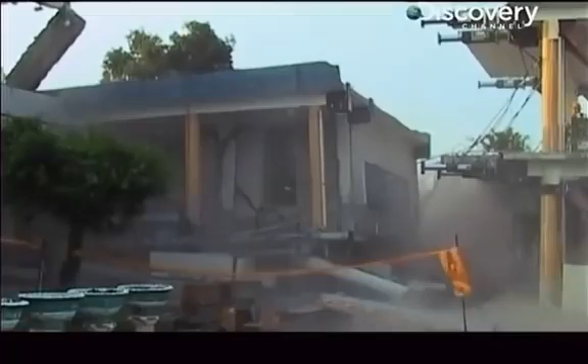Taiwan is under attack. Unpredictable forces of nature threaten the ambitions of this Asian economic giant. To fight back, the island's best minds race to deliver innovative ideas: high-tech factories that manufacture ultra-safe building blocks and assemble them ultra-fast.

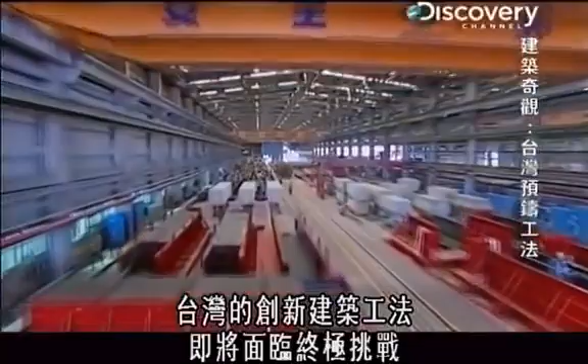Now, Taiwan's unconventional construction method faces its ultimate test: how to prefabricate buildings of all shapes and sizes. A billion-dollar high-tech factory, a 22,000-seat stadium, and a towering 38-story residential block.

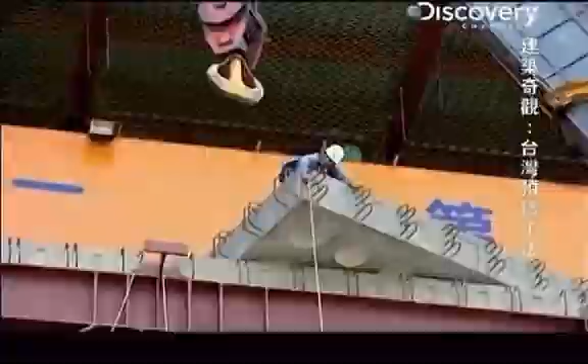Tempestuous weather, near impossible deadlines, and the constant threat of earthquakes combine to make the engineer's job even tougher. This is like Lego, but it's a million times harder and bigger. If they succeed, Taiwan's prefab magic will become a man-made marvel.

Taiwan, a mountainous island more than 30,000 square kilometers in size, is home to 23 million people. Rapid industrialization in the late 20th century transformed it into an Asian economic giant. Its foreign reserves are now among the world's largest.

But Taiwan's growing economy is vulnerable. The island is continually attacked by one of nature's most destructive forces, earthquakes. We have about 200 earthquakes of magnitude 5 every year, and then perhaps we have an earthquake of magnitude 6 about 3 or 4 times a year.

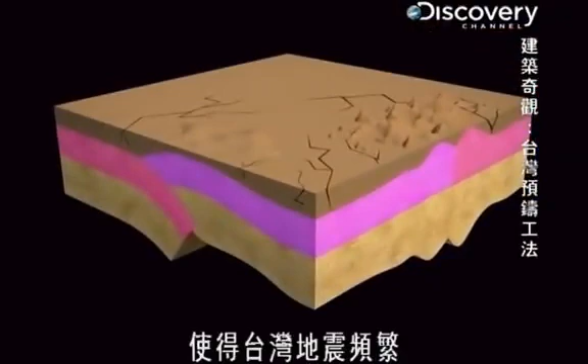Taiwan's geological instability is due to its position on the Earth's crust. It sits precariously on the fault line between the Eurasian and the Philippine Sea plates. Constant movement between these two creates powerful shock waves, producing the many earthquakes experienced by Taiwan, dangerously exposing its densely populated cities to potential devastation.

Many buildings may not be sufficiently strong enough to resist the earthquake force. Beams and columns could be cracked, and even more seriously, buildings could collapse, causing loss of lives.

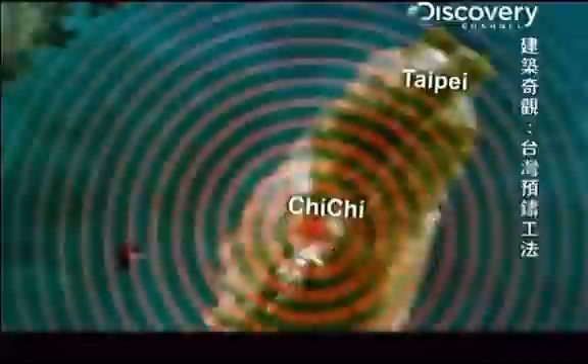September 21st, 1999. Taiwan's worst nightmare came true. A massive earthquake, more than 7 on the Richter scale, strikes the small town of Chi-Chi. It's so powerful that it even rocks Taipei. In the end, more than 2,000 people lose their lives. The disaster, named the Chi-Chi earthquake, cost Taiwan around $9 billion in infrastructure damage.

Coming up with stronger building methods is now Taiwan's immediate priority. Government agencies and universities begin exploring innovative ideas to strengthen Taiwan's buildings. Multi-million-dollar city icons like Taipei 101 spare no expense to arm themselves with state-of-the-art anti-earthquake devices.

Amongst the many individuals working to create unique solutions is engineer Dr. Samuel Yin.

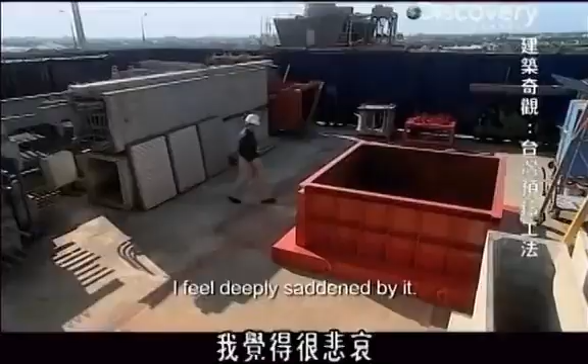Dr. Yin is quick to identify the source of a building's vulnerability when facing an earthquake: it's columns and beams.

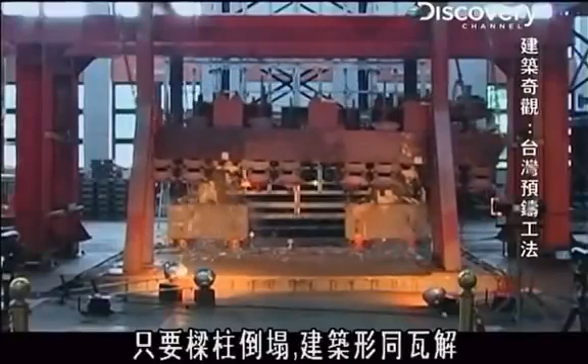An earthquake attacks them with its powerful lateral movements, violently bending their steel skeletons and causing the concrete bodies to shatter inside and out. As soon as they collapse, the building they hold up is as good as finished.

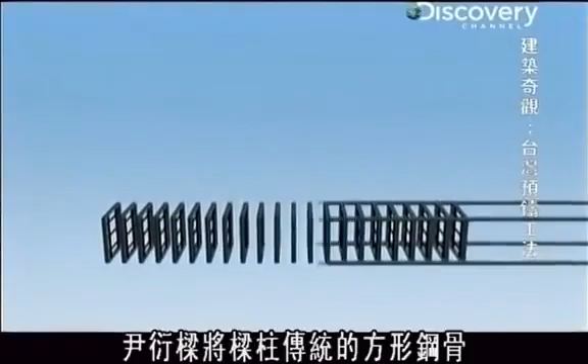Dr. Yin's solution is to replace the squarish shape of a standard beam or column steel skeleton with a unique circular design.

He calls it the Yin spiral. The Yin spiral is twice as stiff to keep its shape during the fiercest quakes. It can also dissipate energy more evenly to keep the concrete around it intact, preventing the building it supports from collapsing.

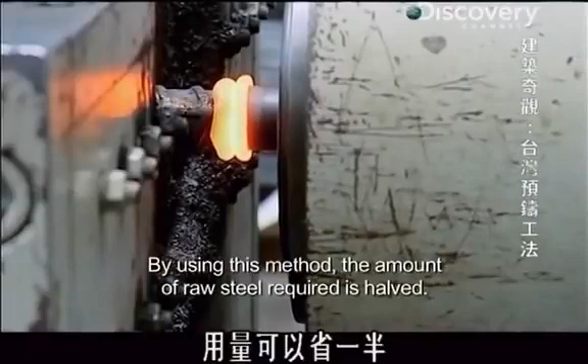But turning Dr. Yin's unique design into a reality is easier said than done. Construction normally takes place on-site, exposed to erratic weather conditions, and prone to human error.

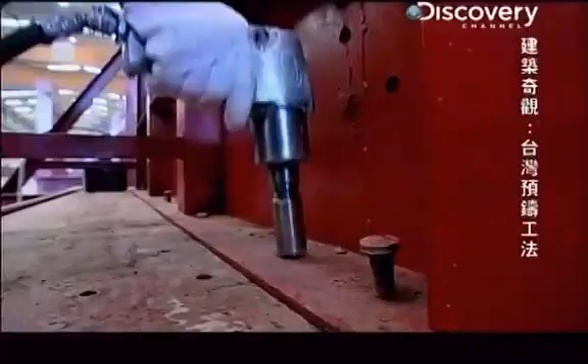Dr. Yin turns to the magic of prefabrication, or prefab construction, for a faster and more accurate alternative. Unlike traditional construction, prefab takes place indoors where the climate is controlled, making the work super fast and hyper efficient.

The finished building blocks are then assembled rapidly on location. It's like putting together a mega Lego set on steroids.

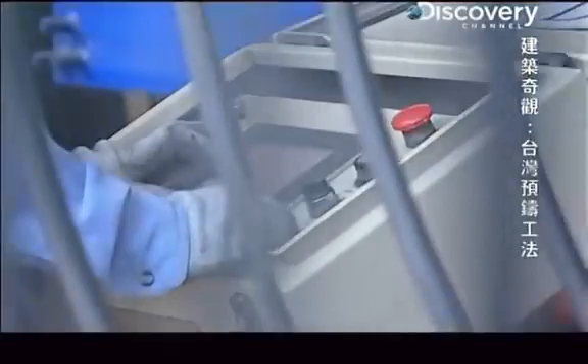Convinced he's found the perfect method, Dr. Yin builds Taiwan's largest and most advanced prefab plant, 10 soccer fields in size, so efficient it can churn out 100,000 cubic meters of concrete blocks in a single year.

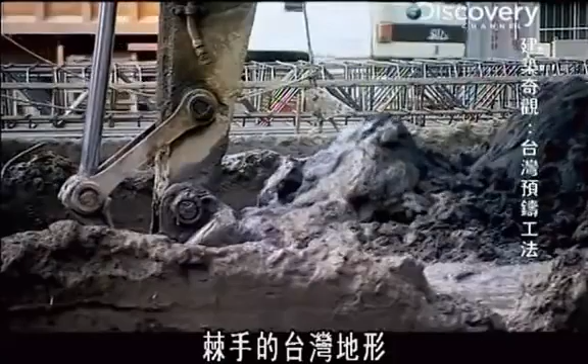Tough deadlines, the unforgiving Taiwanese terrain, and the threat of typhoons will take engineers to breaking point. Will success seal their reputation as Taiwan's genius builder?

Taiwan, home to one of the world's largest prefabrication factories. The giant work floor, 10 soccer fields in area, manufactures concrete blocks for mega buildings, ultra fast and ultra strong. Unlike conventional structures, these prefab buildings can also withstand the most violent earthquakes.

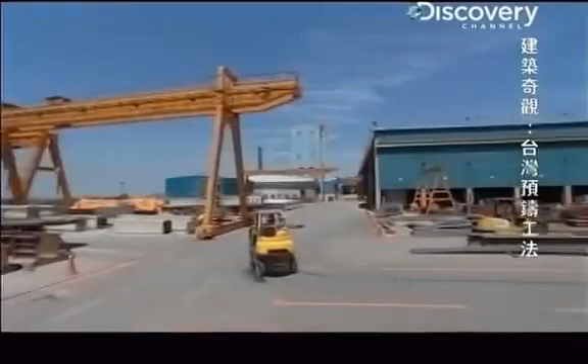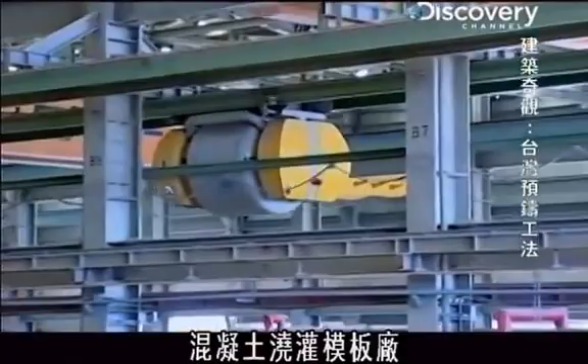The secret to this factory lies in its finely tuned 3-stage process: the steel shop, where high-grade steel is cut and bent into shape; the assembly line, where the steel skeletons of prefab building blocks are put together; and a concrete casting and molding facility, where the mega building blocks get their final shape, ready for delivery.

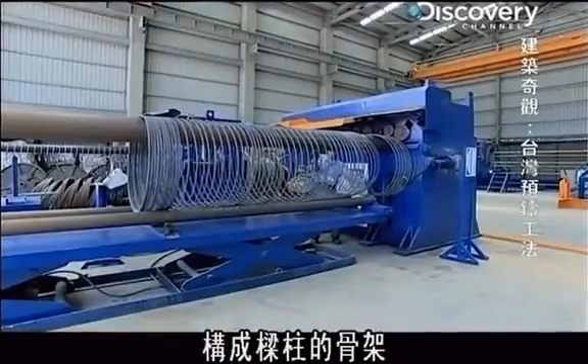It's the ingenious machines that give production an edge. Giant spring manufacturing equipment churns out unique steel spirals that form the skeleton of columns and beams. It's an eco-friendly process that reduces the demand for raw steel by 30%.

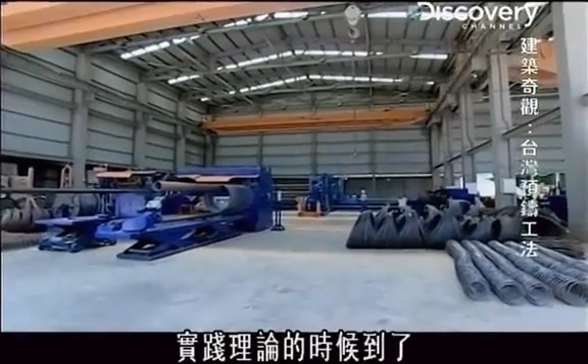The factory is geared up for the challenge ahead. Time now to turn theory into practice. Are they up to the task? To prefab 3 massive buildings of different sizes and shapes in record time: the Taipei Stadium, the 38-story Ocean Blue condominium, and the largest of all, the 600,000 square meter Innolux plant.

Innolux is a homegrown liquid crystal display manufacturer in Taiwan's rapidly growing IT industry. The billion-dollar business is one of Taiwan's most important exports. For companies like Innolux to stay competitive, they require high-tech factories to assemble their sophisticated products. The faster they get their factory built, the earlier they can generate income.

Innolux's latest factory is their most ambitious to date.

In 12 months, engineers have to complete the building and also make it earthquake-proof to protect the factory's sophisticated equipment.

It's a punishing set of challenges that no standard building methods can meet. Except for prefabrication.

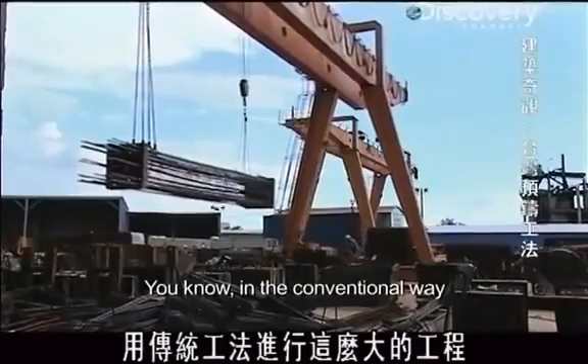Here we have the rebar cage. Engineer Mo is in charge of constructing a building that's up to the job. In the conventional way, if we want to build such a big project, we usually take 2.5 years. Now we only take 1 year.

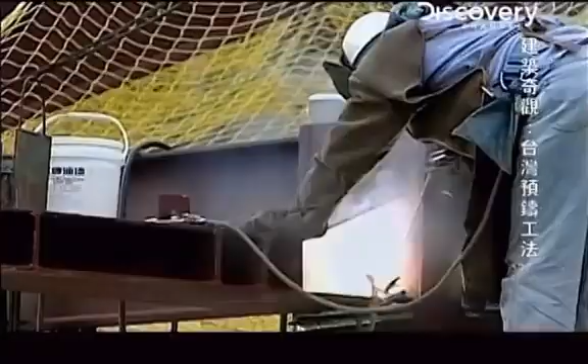Work starts on the plant's massive foundation. Engineers excavate a gigantic area measuring 100,000 square meters. Thousands of tons of steel piles are welded together to form the building's 6-story framework. But these are the easy parts. The biggest challenge is to tailor-make the floors of the plant's largest cleanroom facility.

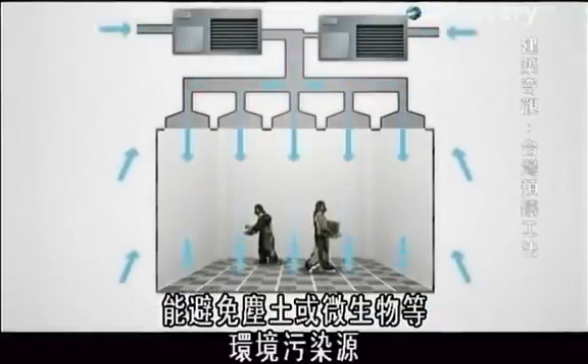Cleanrooms are the most important part of the factory. They prevent environmental pollutants like dust or microbes from ruining the microchips that Innolux manufactures. Inside, a filtering system controls air contamination levels through multiple ventilation points built into the floor. This means that cleanroom floors are riddled with large holes.

So how do you construct a giant floor filled with hundreds of holes while making it earthquake-proof? The engineer's plan is to split the cleanroom's 48,000 square meters of flooring into 1,800 smaller sections, making them easier to prefabricate. Then, to strengthen each piece, they will double the amount of steel and concrete. At the same time, a massive net of steel will form the frame of the floor, holding the pieces together. In this way, the customized floor is strong and stable enough to withstand the most violent quakes.

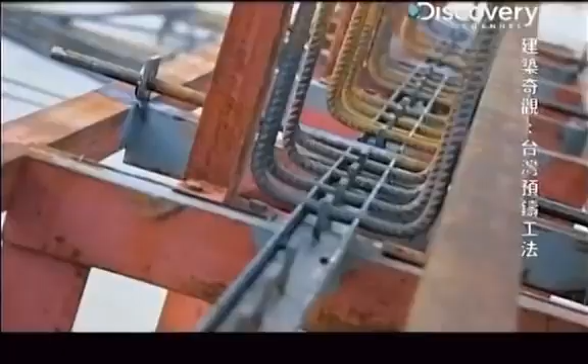With the perfect plan in place, the prefab factory now needs to build the perfect floor. First, a crack force of craftsmen binds the steel skeleton of each floor slab together. The work is fast-paced and done entirely by hand.

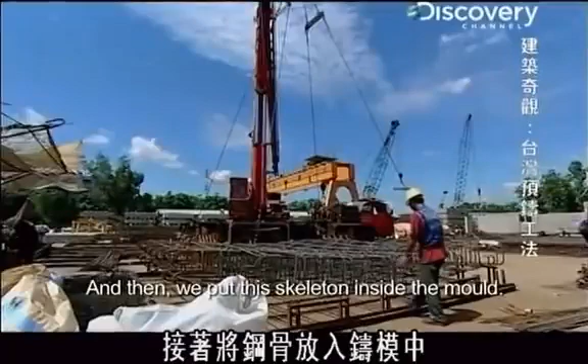And then we have using this skeleton, put inside of the mold. Here is the mold. Here you can see because they have all these grooves, and then all the skeleton of our concrete slab will be fixed into the right location. After the skeleton is inside, we put the bucket inside here, and then we cast the concrete.

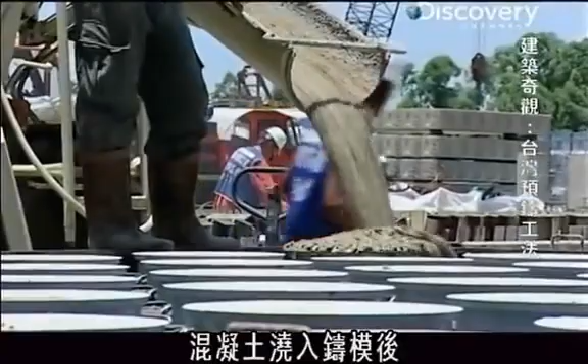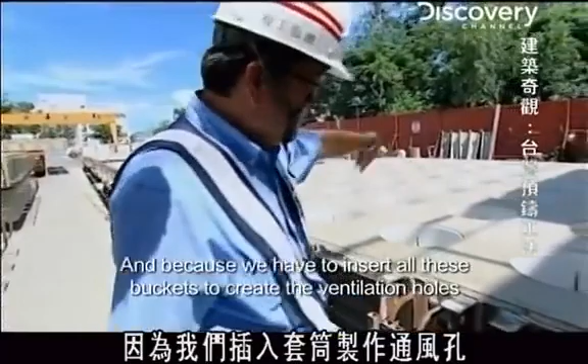As the concrete is poured into the mold, the plastic buckets help to form the shape of the vital ventilation holes. With just 22 molds, the factory is able to prefab all 1,800 floor pieces in less than 3 months. And because we have to insert all these buckets to create the ventilation holes, it looks like a cheese, so we call it a cheese slab.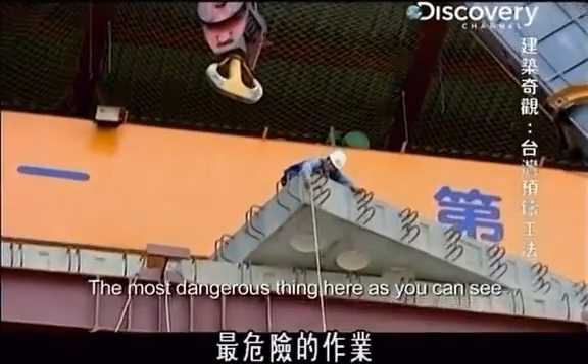The last stage of the process is to install each of the 25-ton floor slabs, not on the ground floor, but 4 stories up. For engineers, it's the most dangerous part of the construction. The most dangerous thing is, you can see, for this 25-ton slab, we have to lift it up to about 30 meter height and insert it into a narrow gap of about 10 meters.

For a job like this, you need a heavy lifter: a 120-ton crane capable of hoisting these giant blocks into place. A crew at the top slides and drops the massive sections into the steel framework.

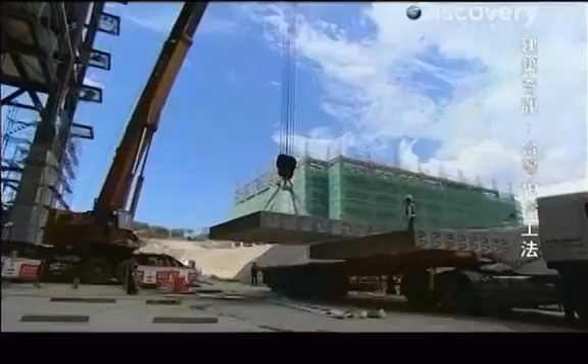You can see, it's up to the right floor, and we have to get that one into that one. The most dangerous part is inserting the slab. If it doesn't go in properly, then we have a big problem. This is a big disaster.

After a harrowing half an hour, and with only inches to spare, the slab rests safely at the top and is moved into position.

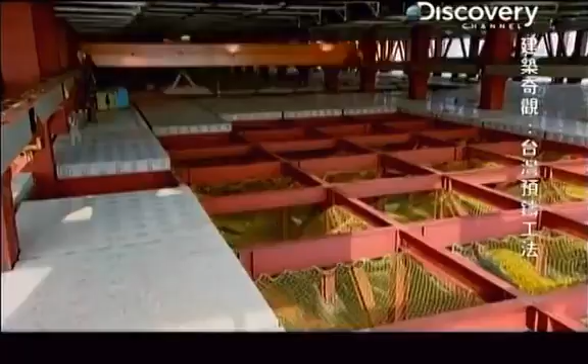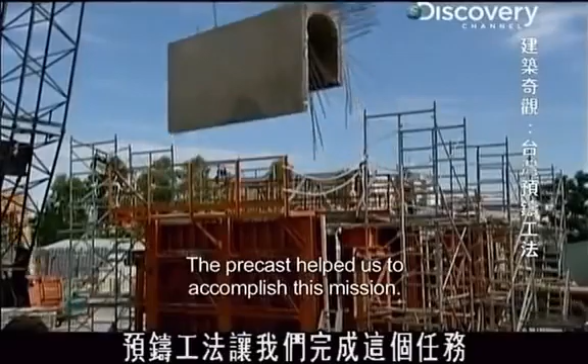Over 10 months, engineers install thousands more floor slabs and put the finishing touches to the factory. Completion of the project is at last a success. This is an exciting experience for me because we had to finish this big project in such a short time, and the precast helped us accomplish this mission.

With the Innolux plant completed, engineers turn their attention to another mega project, the $70 million Taipei Stadium. It usually takes over 30 months to build a stadium this size, but engineers are going to use prefab to shave more than 5 months off the schedule.

If they succeed, it will be the fastest stadium ever built in Taiwan. Only one problem: the city of Taipei sits on some of the softest soil on the island, a condition made worse by an extremely high water table that rises during the annual typhoon season. If engineers want to get the stadium ready in time, they will have to prevent it from sinking into the ground.

Homegrown innovation has been the powerhouse that's propelled Taiwan into the future.

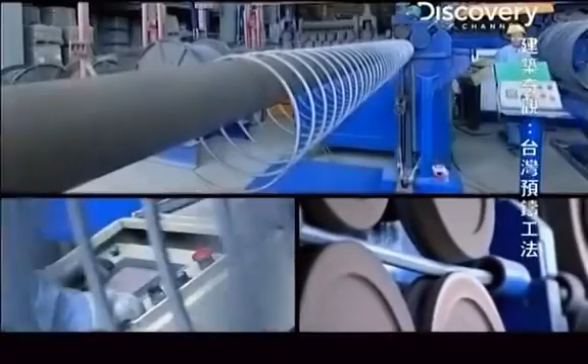The island's largest prefabrication factory is attempting its most ambitious projects to date, constructing 3 mega buildings in record times. Engineers took just 1 year to complete the massive 600,000 square meter Innolux plant.

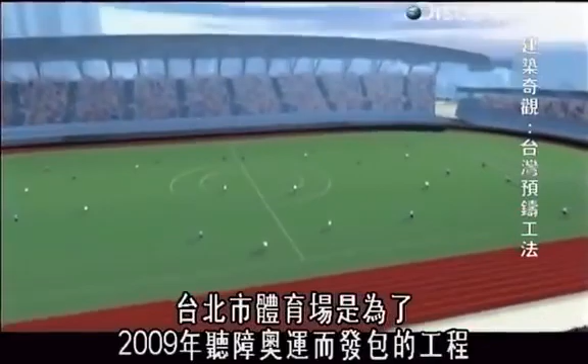Now they turn their attention to their next 2 missions: the 38-story Ocean Blue condominium and the 22,000-seat Taipei Stadium. Commissioned specially for the 2009 Deaflympics, the stadium has to be ready in less than 25 months.

It usually takes more than 30 months to complete something this big. If engineers succeed, they will make construction history. Engineer Zhang leads the project.

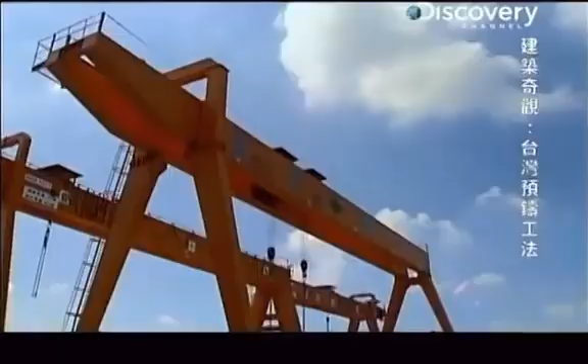Back at the prefab factory, engineers customize the stadium's 900 seating slabs. Specially designed molds of different sizes and shapes churn out the 15-centimeter thick parts. This way, 16 seating slabs can be completed in a single day, a feat conventional methods will find hard to beat.

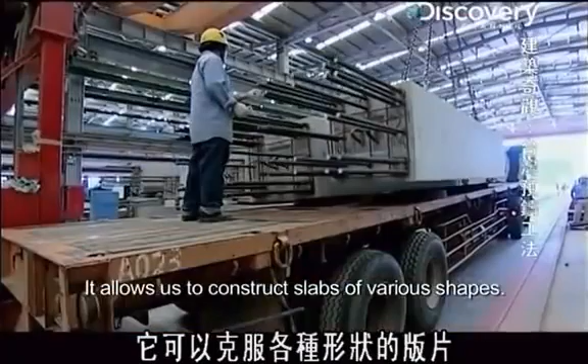More than 40 steel trusses are also prefabricated to form the stadium's roof, each weighing 35 tons. Everything is ready to be assembled.

But first, engineers have to overcome a sticky problem that could ruin their foundation: soft clay.

This unstable soil underlies Taipei because the city sits on a basin. And as the basin is intersected by 4 rivers, the soil also suffers from a high water table, just 2 meters beneath the surface.

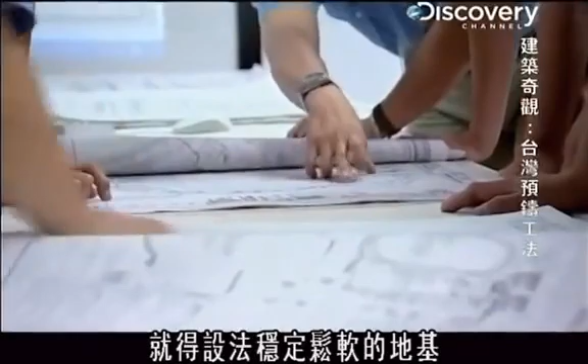For engineers to complete the stadium in time, they need a solution that will both stabilize their soft foundation and counter the threat of an earthquake.

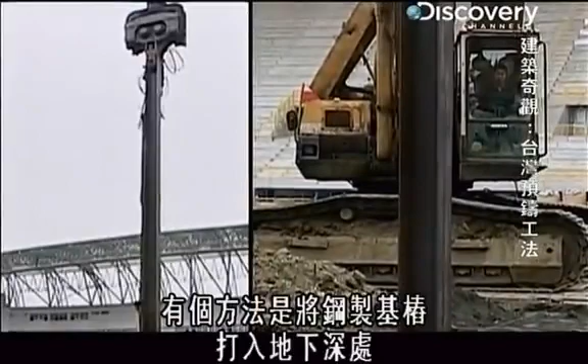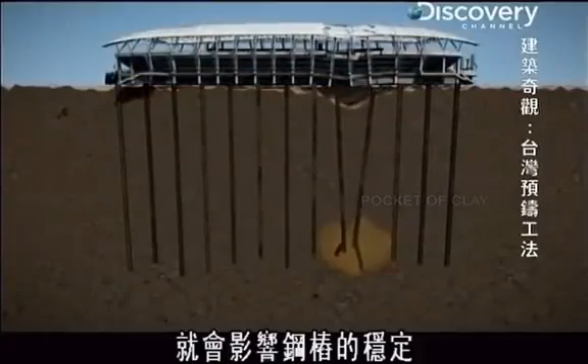One option is to drive steel foundation piles deep into the earth, but it's a time-consuming process, and the amount of steel needed makes it an expensive scheme. What's worse, an earthquake or a hidden pocket of clay could destabilize the steel piles, causing part of the stadium to collapse.

Engineers turn to a conventional but highly effective technique to tackle both problems: mat foundations.

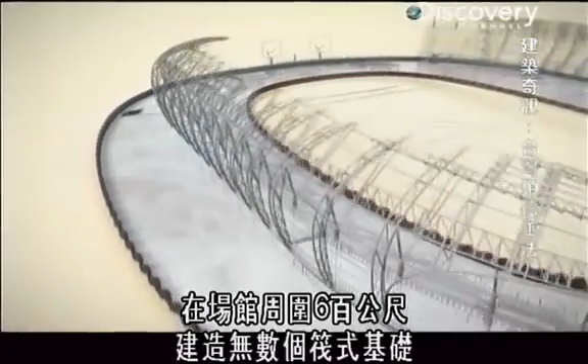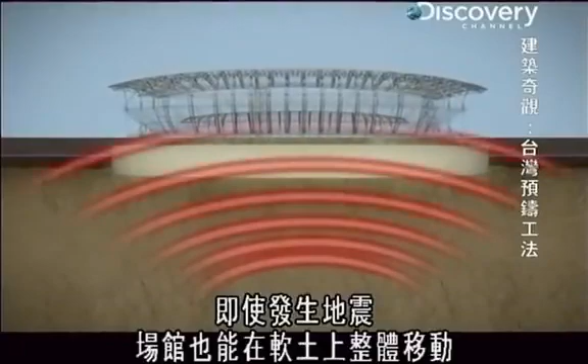Engineers will excavate close to 5 meters down until they hit sand, a stronger and heavier material than clay. Then they'll place a bed of steel onto the sand, reinforced with concrete, creating a mat foundation. By building countless mat foundations around the 600-meter circumference of the stadium, the weight of the structure is distributed evenly across and under the site, allowing it to sit undisturbed within the soft clay and high water table.

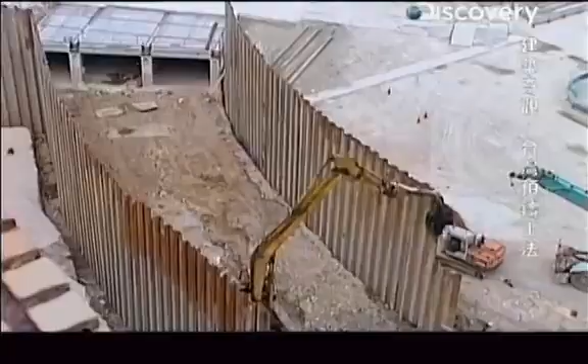First, engineers construct a series of waterproof steel structures called cofferdams. These temporary structures surround the worksite with a wall of steel sheet piles, making it safe to work inside. Then they assemble the steel skeleton of the mat foundation. Workers pour tons upon tons of fast-setting concrete to give the foundation its final shape.

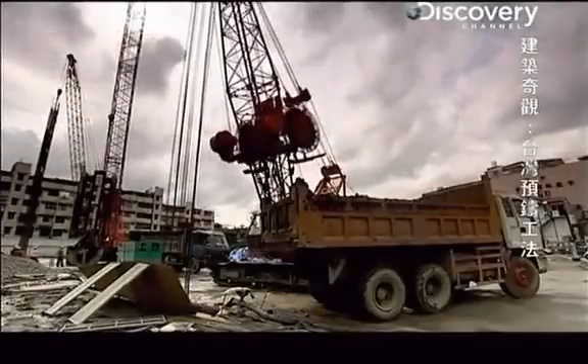But before engineers can finish their work, disaster strikes. The annual typhoon season hits Taipei. A Category 2 typhoon makes landfall east of the city, causing flash floods and landslides, clocking wind speeds of more than 180 kilometers per hour.

At the stadium, almost all the cofferdams are inundated with rain. It's a major setback for the crew.

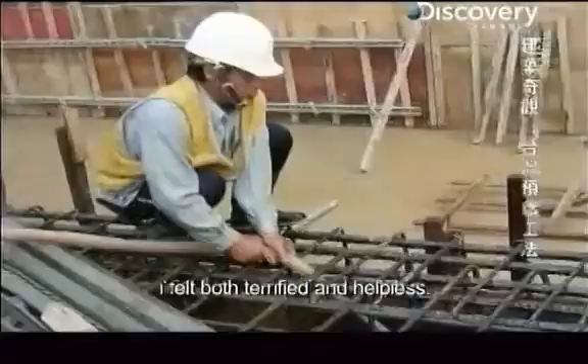Engineers work non-stop to come up with the most efficient salvage plan. They use every pump at their disposal to discharge the water from the cofferdams.

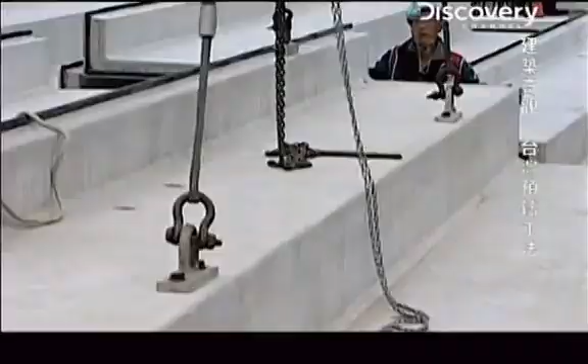Now they begin to assemble the rest of the structure at breakneck speed. The stadium's 900 seating slabs go into position in just 2 months. 3 men and a crane are all it takes to get the job done. And after bolting its massive roof trusses into place, Taipei Stadium begins to take its final shape.

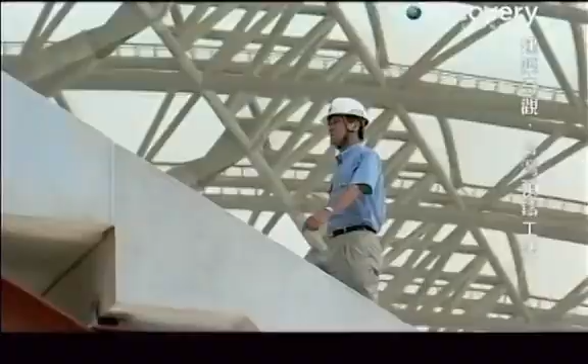Engineers have successfully met their tight deadline.

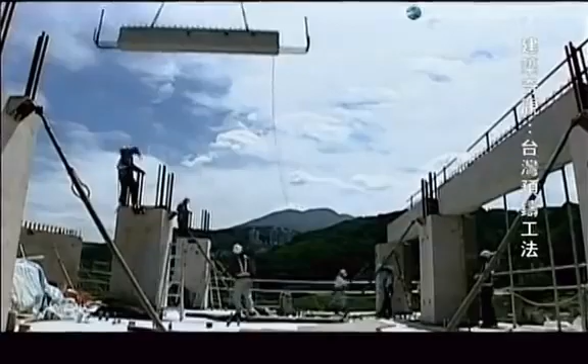With the stadium complete, the prefab factory begins work on another giant project: a towering luxury condominium called Ocean Blue. At 38 stories, Ocean Blue will be the tallest prefab building in Taiwan, constructed in less than 2 years.

Almost immediately, engineers face a major challenge. To make such a tall building earthquake-proof, they will have to build structural supports of near impossible dimensions.

If we use a conventional method, you will definitely have a big column and a big beam. That will cost a lot of money, and because the big column and the beam will occupy a lot of space, it's not good for a residential building.

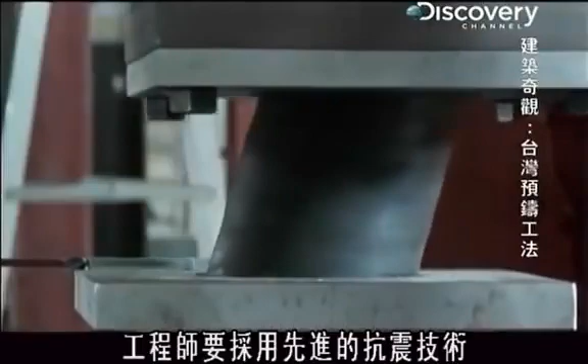Engineers need to bring on state-of-the-art anti-earthquake technology and the magic of prefabrication to create this residential paradise by the sea.

Behind the bustling, prosperous facade of one of Asia's economic powerhouses lurks a constant threat. Taiwan is at the mercy of one of nature's most powerful forces: earthquakes, some measuring more than 7 on the Richter scale. To protect its people and its cities, Taiwan turns to advanced building technology.

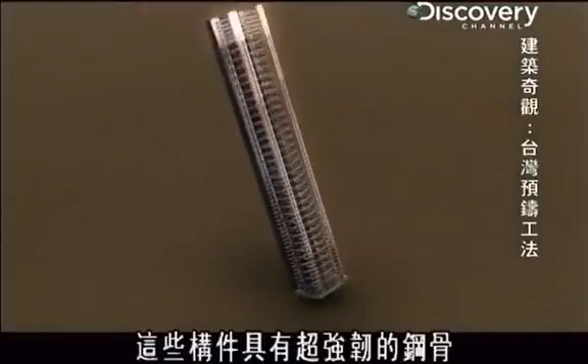Prefabricated construction could be the answer. A massive factory creates high-quality concrete building blocks with production line efficiency, and then assembles them rapidly on site. Armed with a super tough steel skeleton, these blocks are strong enough to withstand an earthquake.

Engineer Dr. Samuel Yin is proud of his achievements.

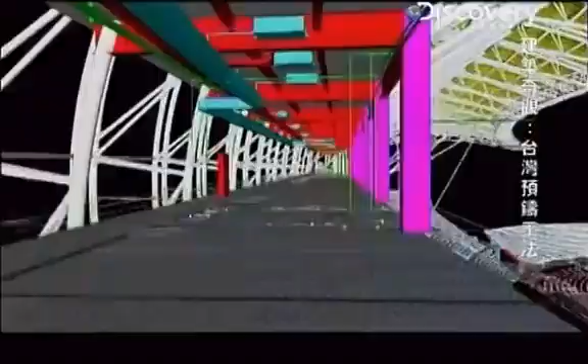Taiwan's largest prefab factory is now facing its biggest challenge to date: building one of the city's tallest residential blocks, the 38-story Ocean Blue condominium.

Engineers there are trying to overcome their first hurdle. As expected, the higher you go, the tougher it is to defend the building against earthquakes.

To make Ocean Blue earthquake-proof, engineers will have to produce columns of impractical dimensions. They will be too expensive to produce and take up too much space in the structure. Engineers have to figure out a more practical solution.

Because earthquake is the most critical issue in Taiwan, so we must build this structure earthquake-proof.

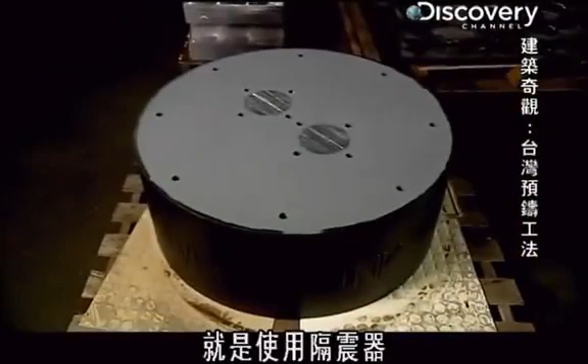Advanced bridge building technology may provide the key: seismic isolators. Invented by New Zealand scientist Dr. William Robinson in the 1970s, seismic isolators are used in bridge construction to dissipate earthquake energy by up to 90%.

Installing them under Ocean Blue could help minimize the size of its structural supports.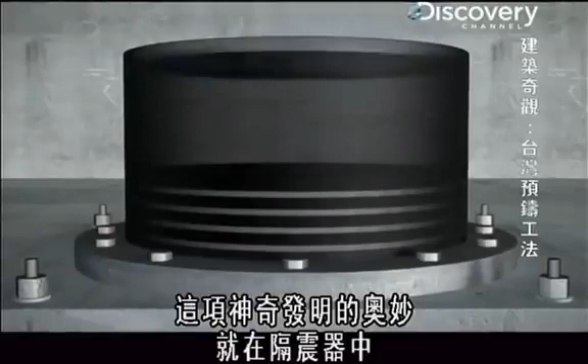Inside, layer upon layer of elastic rubber is sandwiched between powerful steel plates. They serve two purposes: to form a padded compact block to support the pressure of a building above it, and to maintain the shape of cylinders made out of lead, which is both dense but flexible.

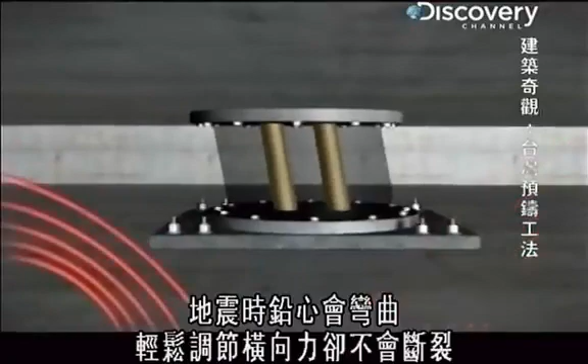When an earthquake hits, the lead bends and adjusts easily with its lateral forces without fracturing, absorbing the energy and distributing it away from the supports of a building.

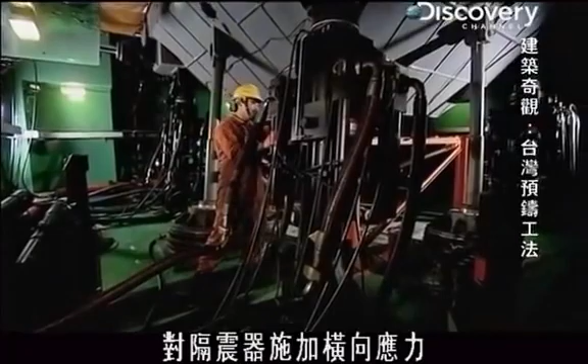It sounds like the perfect answer, but Ocean Blue engineers need to be sure. So they put the isolator through an earth-shattering test. Engineers plan to apply 140 tons of pressure to stress and strain the isolator laterally, adding another 1,200 tons of vertical force to simulate a section of the building's weight.

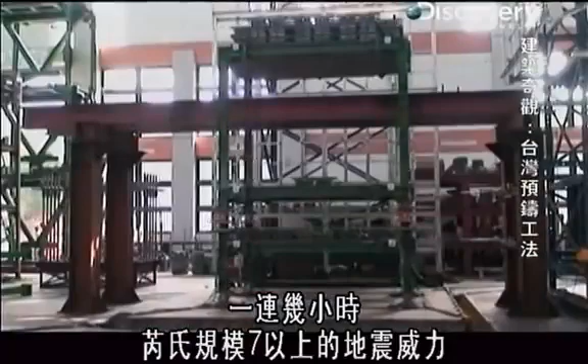The test begins. Hour after hour, earthquake forces of 7 Richter and more strain the isolator mercilessly.

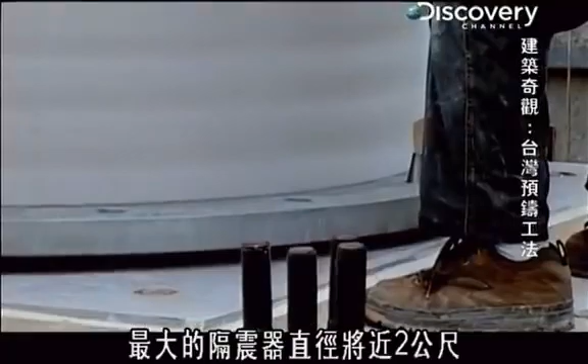A total of 43 isolators will support Ocean Blue, the largest measuring close to 2 meters in diameter. These are the biggest isolators ever used in Taiwan. After 2 months of careful construction and installation, the isolators are finally in place.

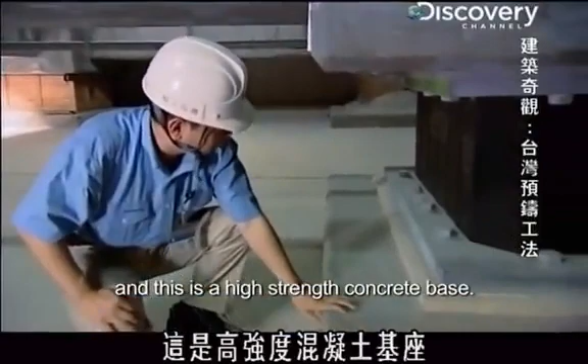This high-strength concrete column and this high-strength concrete base, and between these two structures is isolated.

We are very happy we can complete it successfully.

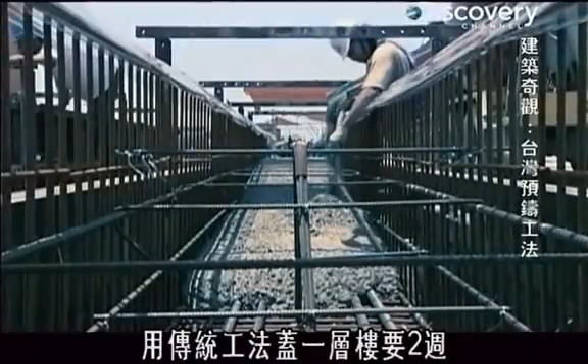With earthquake protection secured, engineers can now focus on prefabricating the rest of the structure. Conventional methods require 2 weeks to complete a floor. With prefab, each floor can be assembled in a record 8 days.

But engineers cannot afford to be complacent. Ocean Blue is located on the coast of the Taiwan Straits. Gusts of wind here can hit speeds of more than 20 meters per second, making construction a nightmare. If engineers are not careful, the hoisting operation could easily turn into a disaster zone.

Taiwan's destructive earthquakes have finally met their match. The island's largest prefabrication factory manufactures building blocks tough enough to protect structures from an earthquake.

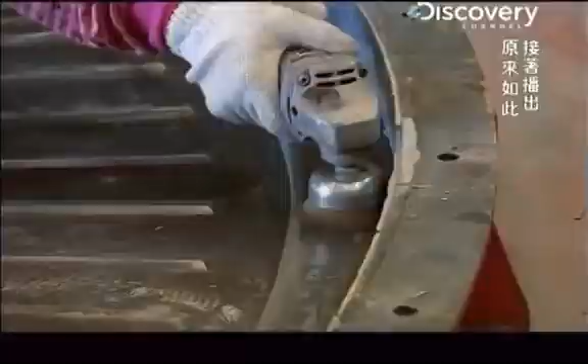Engineers are racing against time to assemble all 38 floors of the luxury condominium. Only one thing stands between them and success.

The powerful winds of the Taiwan Straits. Ocean Blue is right on the coast. Wind speeds here can reach more than 20 meters per second. The higher engineers build, the stronger the wind, making assembly work a tricky business.

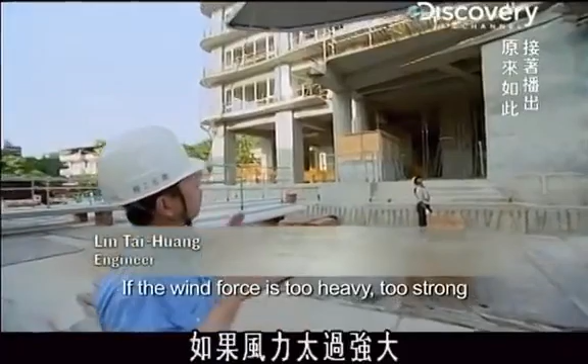For Engineer Lin, it's a weighty responsibility. The most dangerous part of this process, we should consider the wind force. If the wind force is too heavy, too strong, it may cause the slab to hit the building.

One last floor remains to be assembled. Level 38. Time for some serious lifting grunt. A 440-ton crane will hoist more than 60 balcony slabs and columns, some weighing almost 20 tons.

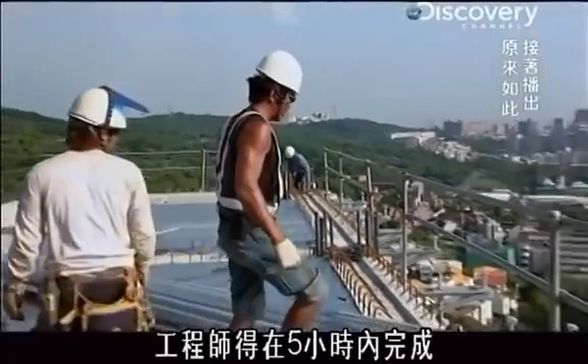It's fraught with danger, and engineers have only 5 hours to get it done. A single mistake or a strong gust of wind can throw the entire operation into chaos.

A little bit nervous. We should be quite careful because underneath there should be no people under the slab. If anything happens, it may cause big trouble.

Okay, you can see the slab almost go to the top. Okay, let's go.

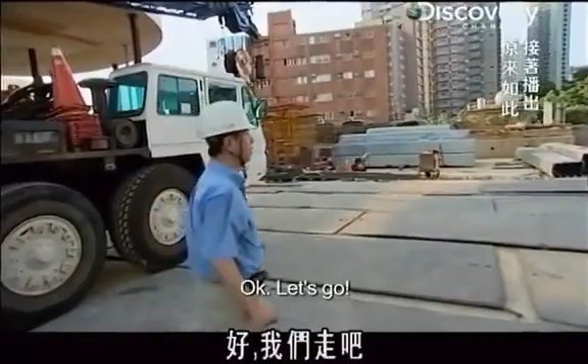On the top floor, a small army of workers assemble the balcony slabs, beams and columns with rapid precision. They know that the longer it takes, the bigger the chance of something going wrong.

This is like Lego, but it's a million times harder and bigger.

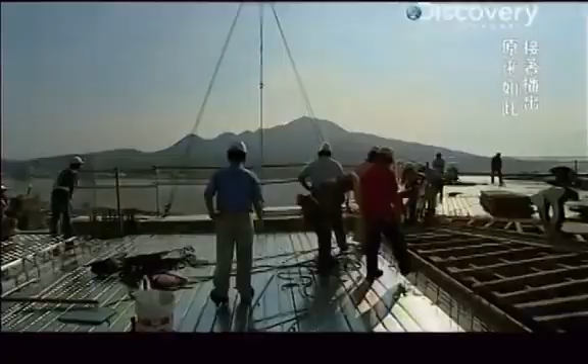As the 5-hour mark draws to a close, the last pieces of the floor finally make the climb and are welded into place.

With Ocean Blue now completed, Taiwan's largest prefab factory has achieved its goal of customizing its unique method for buildings of all shapes and sizes. Besides creating the towering 38-story luxury condominium, they've also constructed a $1 billion high-tech factory and the 22,000-seat Taipei Stadium.

For the factory's creator, Dr. Samuel Yin, success has caught the attention of some of the world's top engineers.